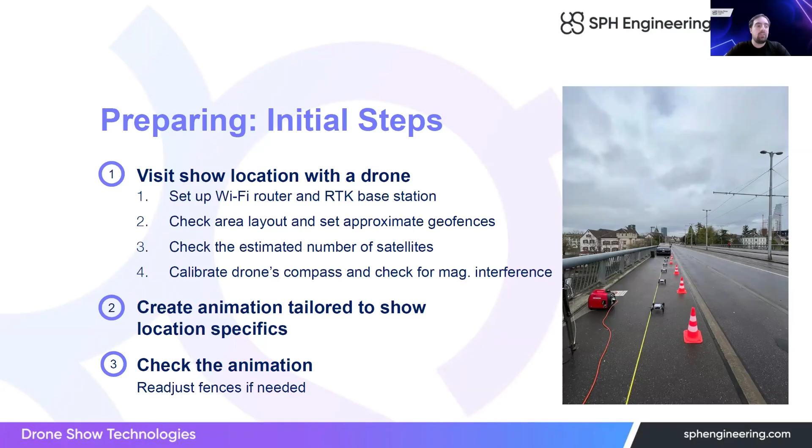Even though the animations themselves are portable, you can use your animation theoretically anywhere. The reality is that most animations are crafted with a specific venue in mind. As you go through that process, there can be several iterations. There can be several such visits. At least one is very important. You can fine-tune your animation and also get a better idea of where to set the geofences for show safety, meaning the areas the drones cannot cross without fail-safing, which is something we'll cover very briefly.

So the show area includes many sub-areas. The takeoff and landing zone, I see a question that asks about it, is where your drones will be set on the ground. The area will be cordoned off, only the drones will be there, and that's the area the drones take off from. They dance, and then they go back and land in the exact point where they took off from. That's the most central area, let's say, of the dance. Around that is where they fly. It's usually a wider area because the animations take space.

With a normal fence, you can configure your drones either to land in place. If they happen to cross it, then they'll just land wherever they crossed it, or return home. Depending on your show, one may be better than the other, but usually landing in place is safer because if you order a drone to return home, it might crash into another. And the hard fence, after which, if a drone for any reason crosses that, it will simply turn off its propellers and free fall.

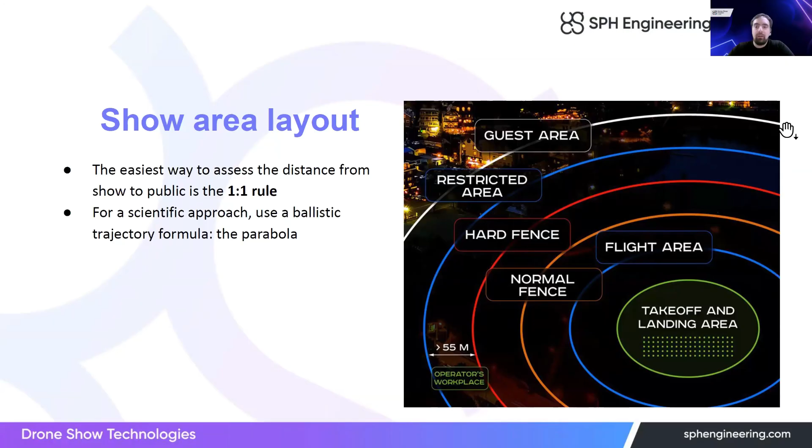After scouting out the venue and planning out its areas, eventually we will make an animation that is a strong candidate for being the final one. And then is the time to bring all our fleet to the venue and make a full rehearsal. Those can be several. You need to do at least one full cycle to be completely cleared for running the show responsibly. And the steps of the rehearsal are as follows. First, you set up everything as it would be on show night.

And then before you ever run the dance, we need to check the integrity of the drones, whether they're flying correctly. A simpler way than running the whole dance is to perform an arm and takeoff test. Arming simply means turning the motors on, so you hear the buzzing from the motors and the props. And if you know your fleet, you will also know what it sounds like. That's the moment if you hear any strange sound, anything that's more intense or less intense than it should, or some strange noise, which could mean something inside the motors. That's when you start looking for drones that may be not up to speed and not airworthy.

And the takeoff test is basically a separate command in which you give it a height, and it will just take off in a controlled manner and hover on that point. If it starts wobbling around more than it should, if it's not holding its position accurately, it may have a decalibrated compass. In that case, you land it and set it apart for calibration. Or it may be having trouble receiving GNSS navigation corrections. It could be a problem in that single drone or a few drones, if only those drones are experiencing that.

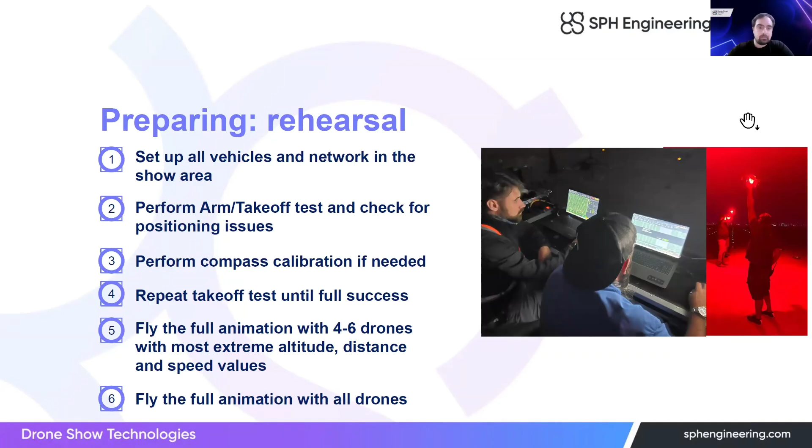Speaking of show night, this is usually how it plays out, as follows. On show night, usually you will arrive, perhaps you may be there even in the morning. Perhaps you can cut it closer, be there in the afternoon, but set off enough hours to do everything calmly. And at this point, do everything as you did in rehearsal. Perform those checks usually like a shift before show night. If your show is at 8 p.m., being ready to do that at perhaps 4 p.m. is already cutting it close. Do it at 2, for example.

It's very important to keep the venue secured. I call it sometimes crowd control. It may be a bit extreme, but make sure that all spectators are where they're supposed to be. No one that is too curious is getting too close to your drones or to your pilots, because we don't want anyone who is not involved in operations to be within the area set off for operators only. Keep checking the wind speed and the weather forecast for your area at all times. Monitor that the whole day.

Even during the flight, you'll make a decision to fly or not to fly usually half an hour to 15 minutes prior to the scheduled time. If weather conditions change and your pilot, your main pilot says it's a no-go, it's a very tough call to make, but still we have to respect that because our main priority is for everything to be safe. And given drone shows are entertainment, we can all wait for another day, another beautiful and unwindy night to run that show, if on the first night conditions change and the pilot finds it better not to fly. Safety first, impressiveness a close second.

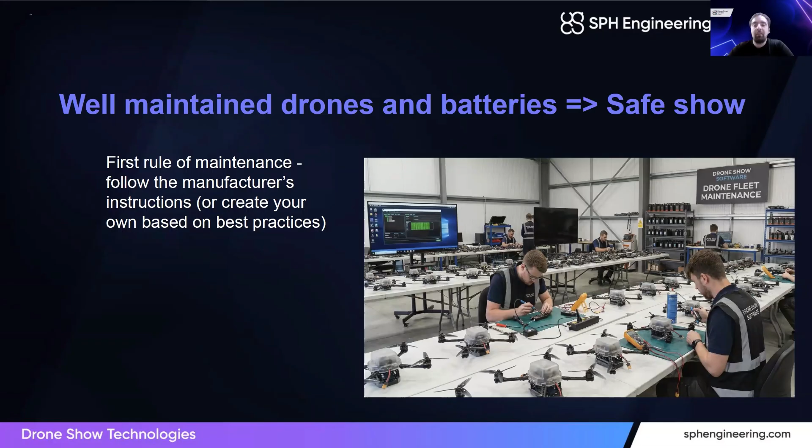A little bit deeper on batteries. One common mistake is to charge batteries fully for storage. That will make them wear out much faster. Most battery chargers allow you to discharge them, if they're overcharged, or charge them up if they're completely discharged, to an intermediate voltage that is meant for storage. Each battery will have its own recommended values. It's usually on the body of the battery somewhere, or if it's not on the body of the battery, probably the manufacturer also has a data sheet with all those values, and you can set them on chargers.

After your batteries are older than 1 year old, you should expect them to have lower performance. So if you plan on keeping using them, do make a test of whether total flight time of your drone with that battery remains the same. Expect it to be lower. You can make some animations that are benchmarks, make it fly around, make it hover for what's the expected amount, and see how the

battery reacts. But remember, batteries in this line of work, they are the main consumables. They are the main supplies that you will be buying in bulk and throwing away periodically and replacing periodically. They don't have an infinite shelf life. Indeed, their shelf life is predictably quite low, a matter of a year, pushing it a little bit more.

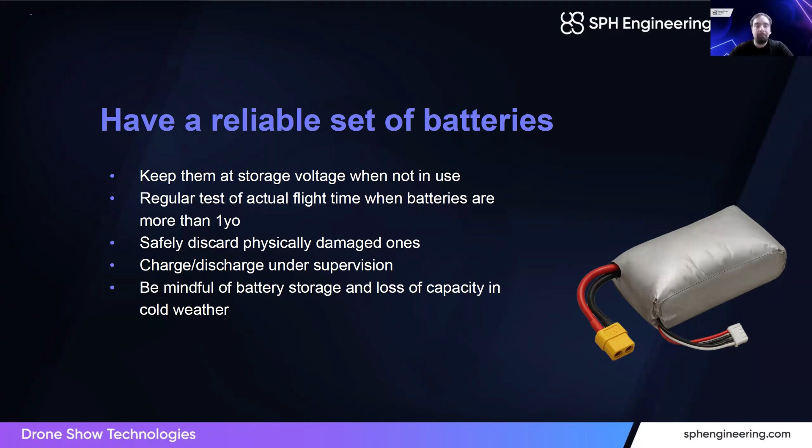On the propulsion system, the propulsion system contains the motor, which is this part that gives torque to the propellers, and the propellers are this aerodynamic wing part that actually create the forces, the lift, and all the other forces that allow the drone to fly and move around in the air.

Within the motors, usually they're a little bit exposed at the top, if you can see. Check if there's anything, give it a little spin with your fingers, see if there's any resistance that shouldn't be there, any sort of dirt within there that could have gotten inside from flying in sandy or dusty conditions.

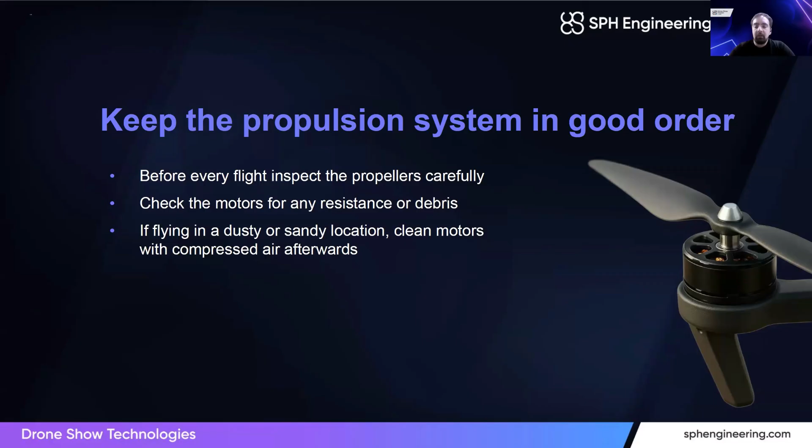You can use a small compressed air pistol. Don't make it too strong, because the components are fragile, and clean the insides of the motors and rid them from any external bodies.

One very important thing that we highlight a lot in our full training is team management. So having an educated team from the outset means, as your team gets experience, they will get experience in the right things, and your show will be safe, and flying will be smooth. So we work with many acronyms in this industry. So if you're not familiar with RPIC, that means Remote Pilot in Command.

That is the person who is running DSS, the main suite, the main control program, and has final authority on running or stopping the show. If the remote pilot in chief or in command makes the call that the show should be canceled, we should listen to them. They are usually the most experienced pilot.

There's a co-pilot who is just as well prepared and qualified as the remote pilot in chief, who is sitting besides the pilot in chief and monitors red button. That's our secondary program that allows us to issue emergency commands over radio. Whereas DSS works with Wi-Fi, the red button uses radio. So there are two completely different principles of communication.

This redundancy renders robustness to the system and allows us to keep in contact with the drones with much more probability than if we had just one channel. Additional flight crew members would be field observers, people who are looking at your show from different angles and usually have a walkie-talkie to communicate with the pilots if anything seems off.

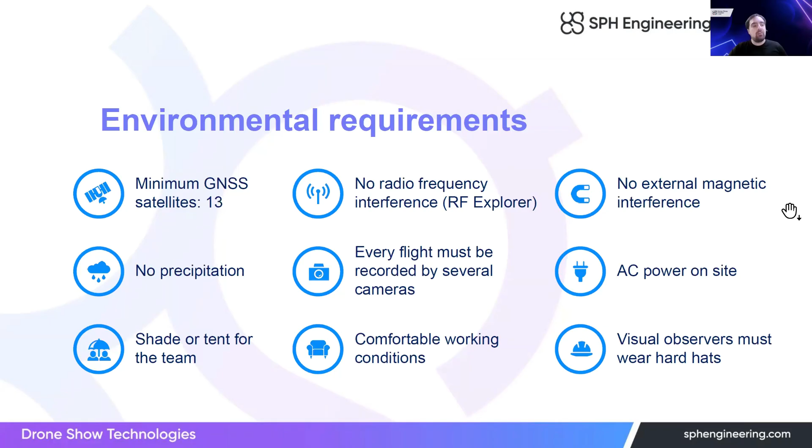And give the visual observers who are deployed all along the field hard hats. In the very unfortunate possibility that a drone could fall, the hard hat would protect them from very serious injury. So no one who is inside the operations area should be without personal protective equipment. Also, reflectors are important because we're working at night and we want to see our crew members.

About wind, our general recommendations are that if baseline wind is up to and including 5 meters per second, you can fly, that's safe. Between 5 and 6, it depends on how that situation is expected to develop, but be cautious. It's not a hard no, but it's not a hard yes either. But over 6 meters per second, do not fly. Wind gusts are also considered. Those have a bit of a higher value, but if those gusts are becoming too frequent and getting close to becoming baseline wind, also don't take unnecessary risks.

The best way to measure wind speed is to have an anemometer, which is a wind measuring device, on site. That is the most real wind you will get. The next best thing is to rely on the closest meteorological station, which is something DSS allows you to do. There is the weather service that picks your dance center, finds the closest source of real weather data. It's usually an airport, but it doesn't have to be one, and parses out that information in real time for you on DSS itself. But always the best data is direct local data.

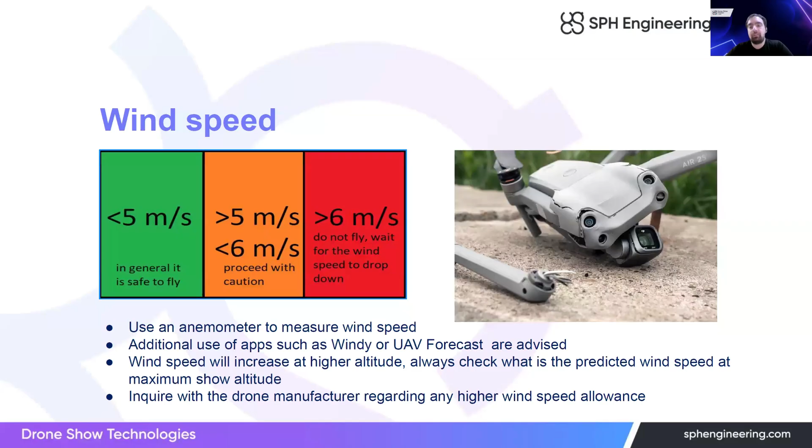And each drone manufacturer has a wind resistance rating for their drones. So check that, inquire with them. That's usually a documented piece of data that's listed in the data sheet of the drone. Just the fact that the drones are able to resist that wind doesn't mean they will fly properly if that wind is there. So a drone may be able to fly, but it won't be able to make the dance, and the dance will be distorted. So the best is always to wait for good conditions.

On GNSS interference, which includes jamming and spoofing, that's a very hot topic. That's often making the rounds in the news. But many people use those terms interchangeably, not knowing what each of them means. So here, we're using this opportunity to teach you the difference. Jamming means whatever navigational data the drone was receiving properly, now it's receiving basically what amounts to noise. It's receiving junk data that's not well formed. It's completely confused, if we were to treat it as a person. So the symptom is that it flies in any direction. It looks like complete chaos,

and it may be due to completely innocent causes, some interference or bad satellite coverage in that area, sometimes a rogue cloud, sometimes an airplane, things we truly can't control, and there is no guilty party to it, or caused by a bad agent with a jammer. So that can't be ruled out either.

And spoofing is feeding not noise data, not trash data, but well-formed data, but purposefully wrong. Let's say we are flying in New York, and some bad agent feeds into our drones that they're supposed to be in Los Angeles. So they'll all fly in a concerted manner in the wrong direction. They will all try to make it to LA suddenly. They will hit the fence and they will fail safe or disarm. So spoofing looks very different from jamming.

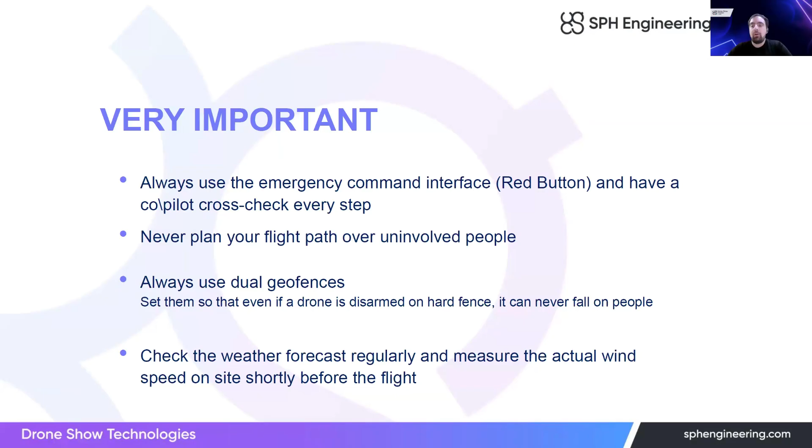Monitor the weather forecast. Remember, weather can change. Remember, the weather you see is more important than the weather in the model you see on a website. Make real decisions based on real observations. Use the model as a reference. Make the main call, fly or no fly, just before the flight, but also monitor changing conditions during the flight.

So thank you for listening. Now I'm giving the word back to my good mentor and colleague Arturs. He's going to cover technical aspects, more related directly to the technology. So I'll be taking your questions now, as he was when I was speaking. Thank you, Germano, for the very detailed explanation of the operational aspects. Yeah, I will be talking more into the technical stuff, more into the technology behind this.

So let's get started. First of all, we position ourselves as a safety-centered solution for drone shows. We have very detailed and several layers of safety built into the software. Let's talk about some of them. So we have a summary that summarizes all the pre-flight aspects in one window. So you don't need to switch to different windows or menus to check for all the small details that should be checked before every flight.

You have one window that shows you just simple green or red if some of the subsystems are ready or not, and you can dig into the depth, what lies beneath it, to investigate why any of the systems are not ready. Not only that, but each of our drones constantly checks its own health. So we have more than 70 health-related metrics being checked by the drones throughout the flight and before the flight. In case something goes wrong, the drone immediately informs the operators over the DSS interface that there is a health-related situation, and we also have different levels of severity for these alerts.

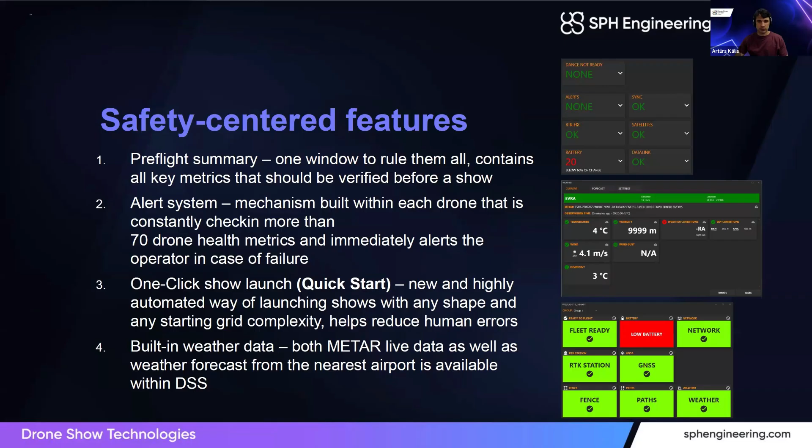Since the latest DSS version, we have a new additional failsafe or fence layer built into the drones themselves. So in case a drone would deviate from its designated flight trajectory by a specified amount, let's say 5 or 10 meters, the fence can be triggered even before reaching the geofence that you marked on the map. Thereby, we minimize the chances of a drone leaving its designated flight area before it even gets far away from its position.

So this way, the fence can be triggered much sooner than allowing the drone to travel up to the borders of the designated geofence. But the geofence still remains intact. So if for some reason the path deviation fence is not triggered, we still have both the soft and the hard geofence layers.

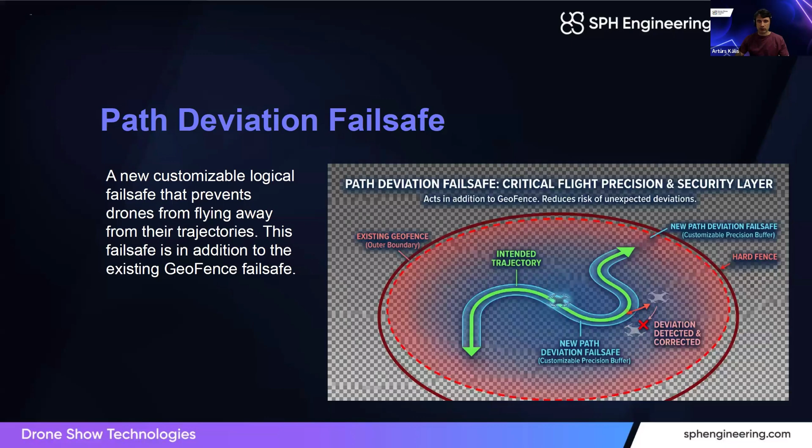Take a look at the quick start that I already mentioned, and let's mention some of the features that maybe elevate the safety when using this form of show launch. So with the help of Quick Start, it is possible to start from any shape on the ground, meaning that the drones no longer have to be positioned in a perfect grid.

They can be positioned in a random formation, thereby reducing the time needed for the crew to set the ground formation. The drones can be put even 1 by 1 meter apart, as long as the propellers don't touch. And Quick Start will generate safe landing and takeoff trajectories for any type of formation on the ground.

It is also not necessary to do small adjustments with the show location to match the starting grid. This is also done by Quick Start automatically, as well as selecting the most healthy drones. So by using Quick Start, you can put out slightly more drones than necessary, and Quick Start would, based on the alert system that each drone has, select the safest and healthiest drones for a particular show.

So again, no need to worry about swapping drones. Quick Start will do that for you, thereby maximizing the execution of a perfect show. And as well, there's only 2 clicks needed to start the show. So first, to set the start of the show. Second, to confirm it. And that's it. Only 2 steps are required for the operator. But like I said, at the same time, the safety of execution is still maintained. We are potentially limiting human errors by use of the new tool.

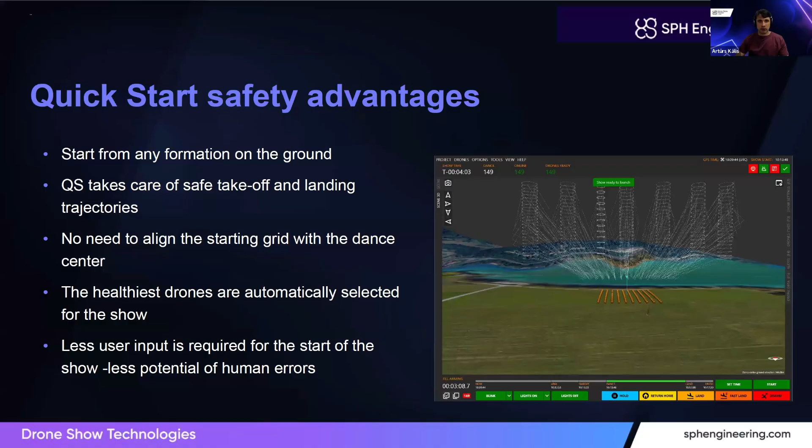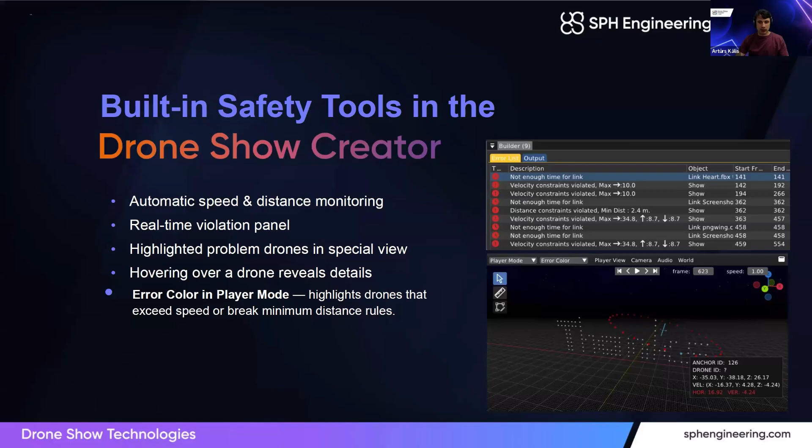Additional to that, even when designing as the first step of every show, we have built-in tools in the drone show creator that automatically check speeds in the design as well as distances. So we have real-time information about this when designing each step of the show. This is highlighted, as you see in some of the screenshots, with red. So if there's a too fast or a too close drone, that is immediately notified to the designer.

Since pyrotechnics are becoming a more popular part of drone shows, and integration with pyrotechnics is becoming more common, our firmware does also integrate fully with the pyrotechnical support on the drones, meaning that the drones supported by our pyro system do not rely on external communication to trigger the pyro. This allows us to do much more in regards to safety than if the trigger would come from a ground

element or ground trigger. With the use of built-in triggers, we can ensure that a drone has reached minimum safe altitude before the pyro is triggered, as well as if the drone has a health alert or health condition that is not safe to shoot a pyro, the drone itself will know that and prevent the pyro from triggering. This way, again, we don't need to rely on externally disabling a pyro trigger. The drone itself will know it.

But at the same time, we may have another layer of safety, so another external safety mechanism that we can trigger even on top of that. And the additional benefit of using a built-in system in the drone is that it directly allows for synchronization with the lights as well as any external devices by using timecode.